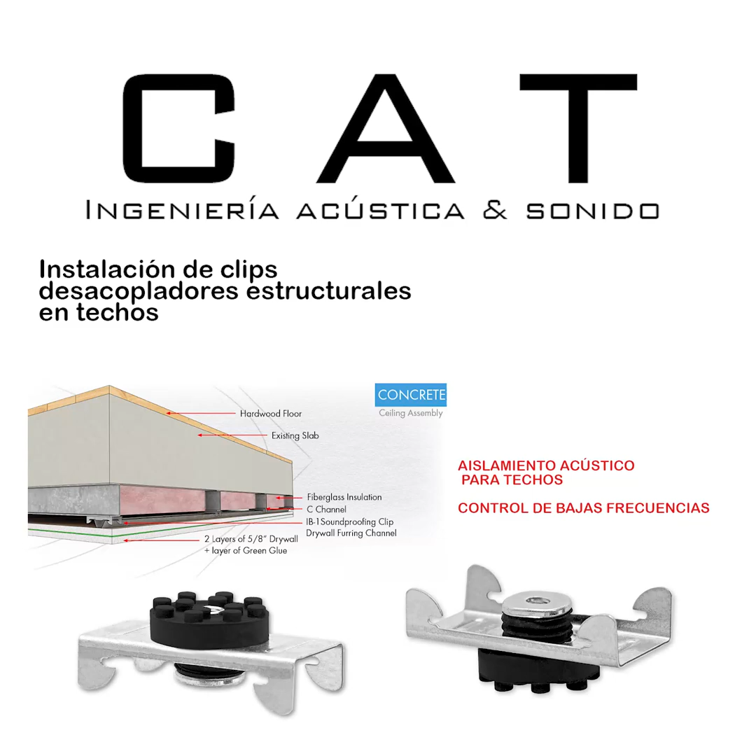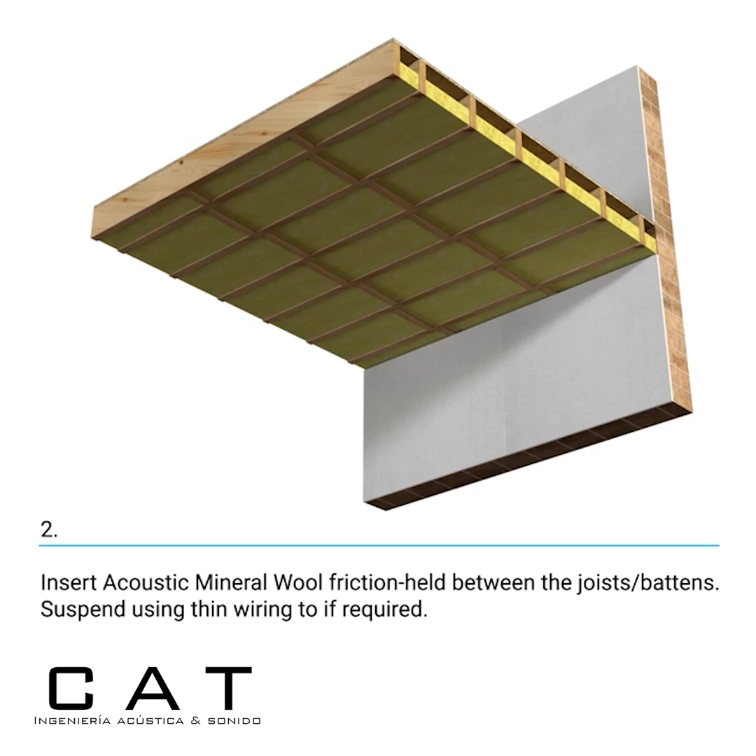Mute clip installation. Ceiling. Begin by inserting acoustic mineral wool between the joists. Acoustic mineral wool can be friction held between the joists or battens. If required, use thin wiring to keep it suspended. The cavity should be filled approximately 80%, so not to compress the mineral wool.

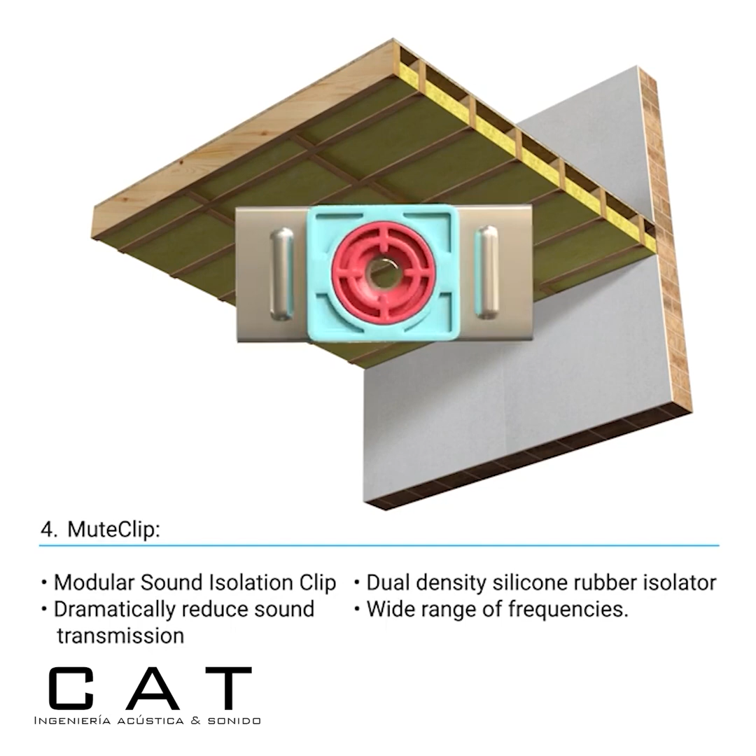Mute clip is a modular sound isolation clip with a dual-density silicone rubber isolator that can dramatically reduce sound transmission over a wide range of frequencies. The mute clips around the perimeter of the room should be no further than 100 mm from the adjacent walls.

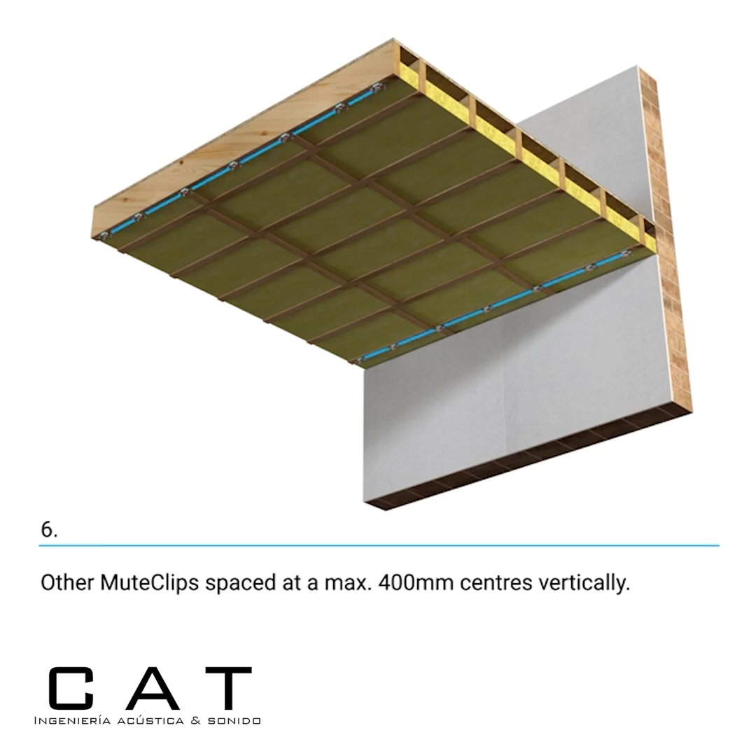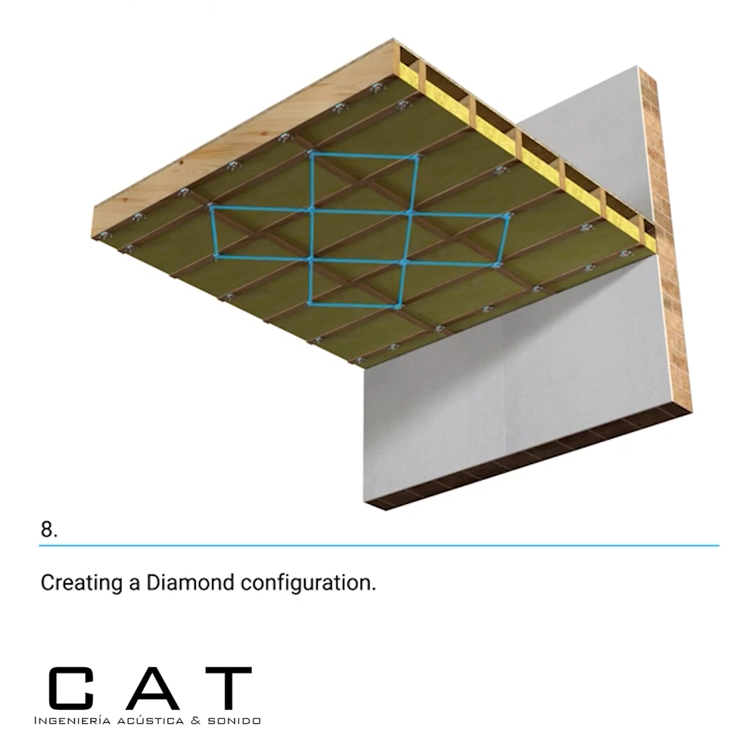The other mute clips should be spaced at a maximum of 400 mm centres vertically, moving a maximum of 800 mm horizontally, creating a diamond configuration. Attach mute clip channels into mute clips. The channels must run perpendicular to the joists.

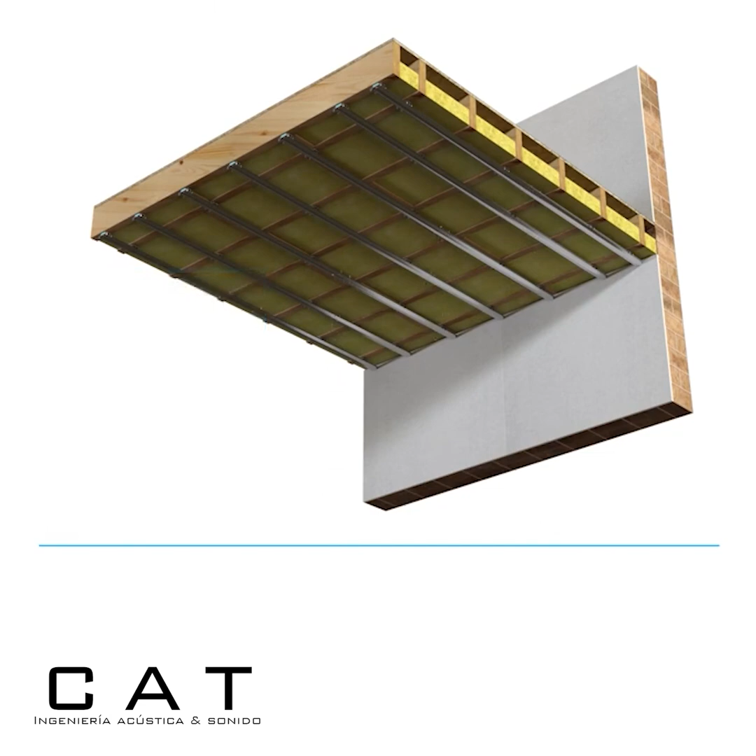When joining two mute clip channels, they must overlap by 200 mm. You should then fix 4 self-tapping screws into the shoulders of the mute clip channels to give a secure join. Next, fix your first layer of acoustic plasterboard to the mute clip channels.

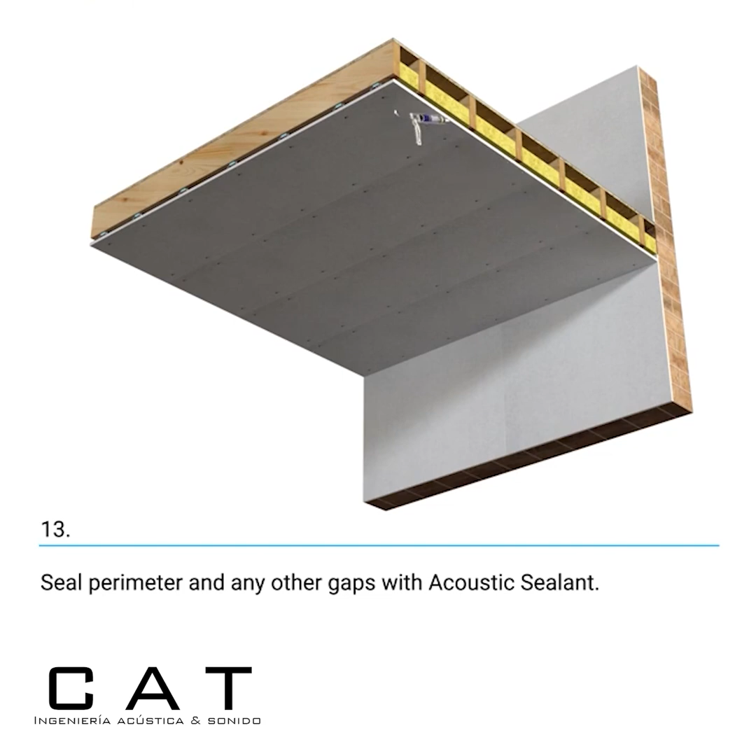There should be a 2 to 5 mm gap around the perimeter of the surface. Acoustic plasterboard must not be in direct contact with any adjacent surfaces. Seal the perimeter and any other gaps with acoustic sealant.

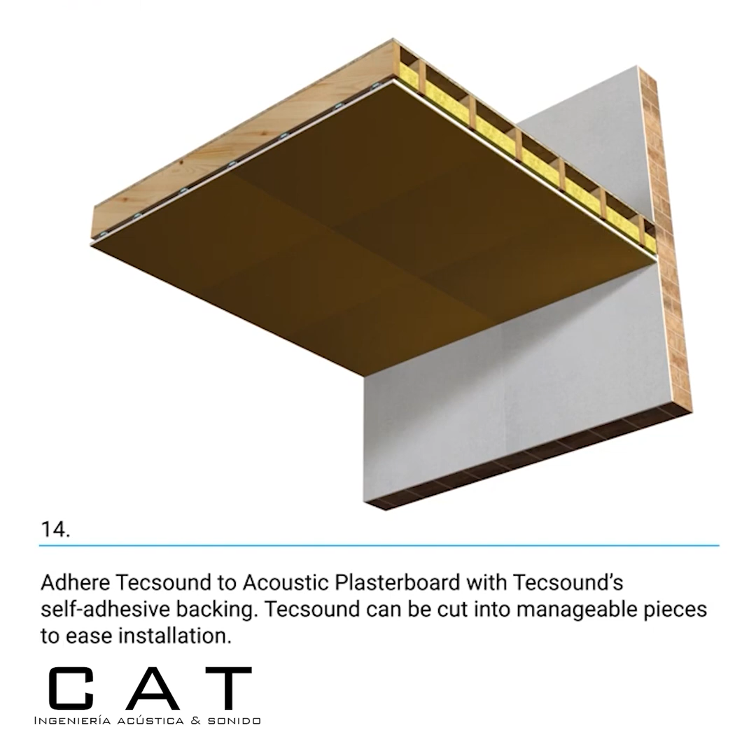Next, adhere Tecsound to the acoustic plasterboard using Tecsound's self-adhesive backing. It may be easier to cut Tecsound into manageable sized pieces for ease of installation. Try to ensure the joints are staggered between layers.

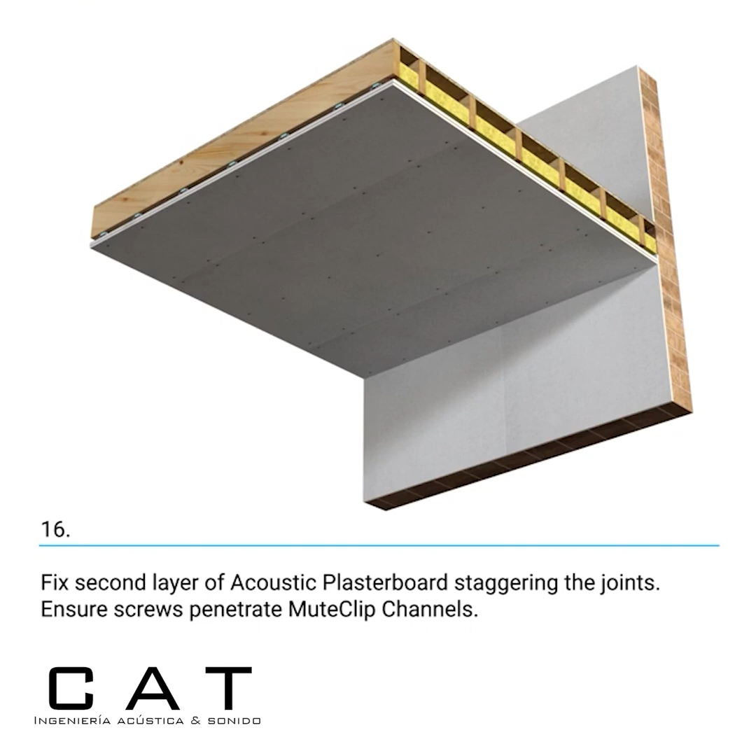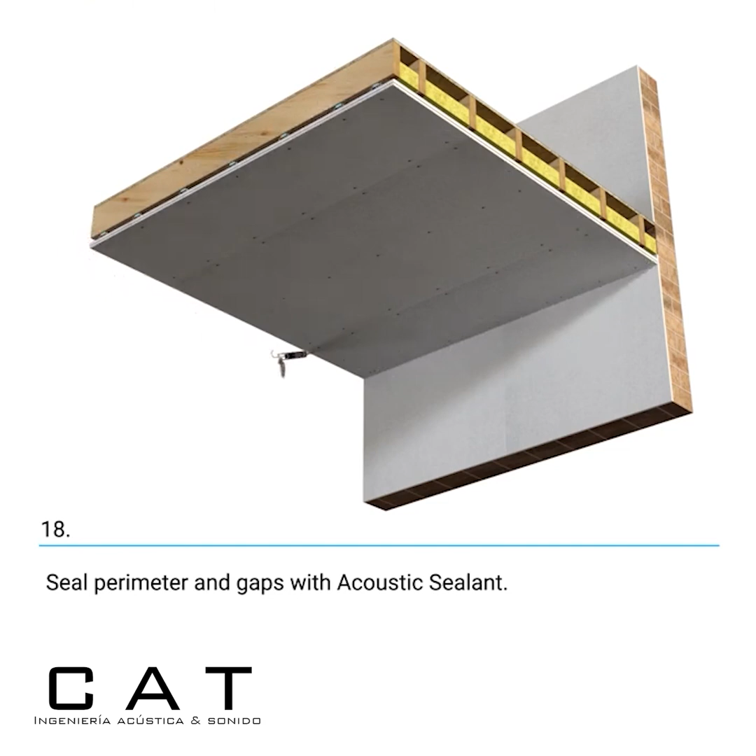Fix your second layer of acoustic plasterboard, again staggering the joints, making sure that the screws go into the MuteClip channels. Again, ensure there is a 2 to 5 mm gap around the perimeter of the room. Seal the perimeter and any other gaps with acoustic sealant. Scrim tape all joints and finish with a skim plaster.

Please note, the layers of this system can vary in thickness and mass. This can affect the centres or numbers of clips required to support the weight of the system.